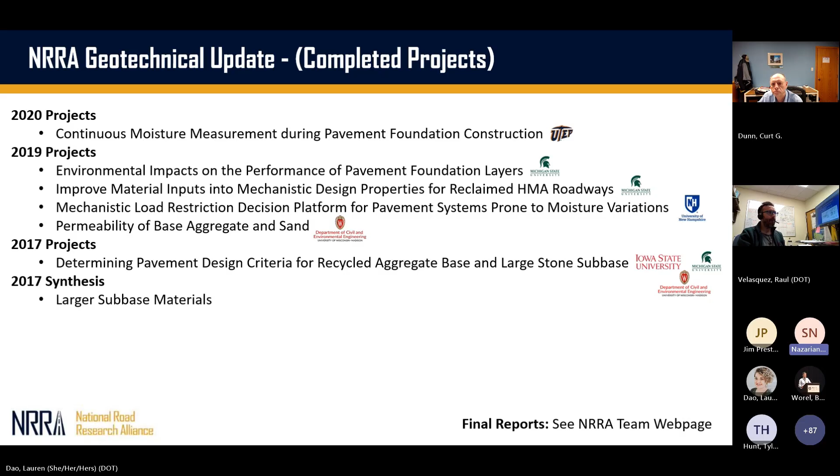I wanted to show you this in the context of an infrastructure asset lifecycle, what we have accomplished thus far since we started this pool fund in terms of the geotechnical team and deliverables. So I'm trying to map the outcomes and results from the research completed so far in this lifecycle asset.

If we go into the design phase, we have completed and made ready available for state DOTs and practitioners some nice guidelines for the use of recycled aggregate bases. We also have a very nice database that practitioners and researchers can use for MEPDG analysis of recycled aggregate-based materials, focused mostly on mechanical properties like stiffness, resilient modulus, strength, and Poisson's ratio. So if you are doing sensitivity analysis of certain recycled materials, you can use that database, summarized very nicely in that research project.

We have also developed and improved criteria for selection of materials for drainability purposes in the context of unsaturated soil mechanics. That was pretty nice, led by University of Wisconsin-Madison, and that project won an award at TRB for best paper of the geotech section, I believe. It's very simple criteria you can use - you get the gradation of your material and some additional parameters, if available, to select in terms of drainability whether it's okay or not to use that material for pavement purposes.

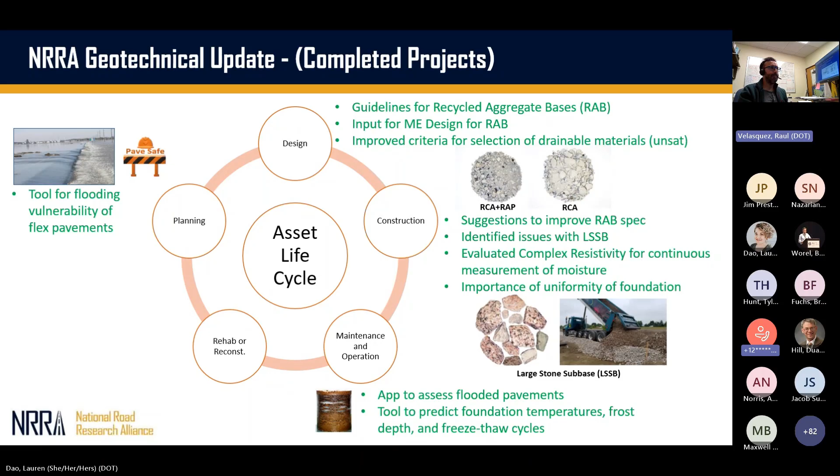I'm sorry, I forgot this one - we have these tools available. Right now you can go and access this information and add it to your engineering toolbox. We have this app you can use for assessing the quality of your pavement after and before flooding, and you have a screenshot of the current version available after phase one of this project. The team is going to provide an update - they are developing a new GUI improved version of it, but you have this version available if you want to use it.

We have also developed a tool in Excel and in Python - Excel for small data sets and Python for large data sets - to predict temperatures and number of freeze-thaw cycles and duration of freeze-thaw cycles, for planning purposes and for estimating performance of your pavement foundation.

You also have this nice unsaturated framework to assess if your material is good in terms of drainability or not - very straightforward, very simple, nicely developed by UW Wisconsin. And then, I think this is very nice, we also have two databases available on the project website for properties of RCA and RAP for pavement foundation purposes. So these are the four tools that we have developed so far that you can easily access and start using. Next, please.

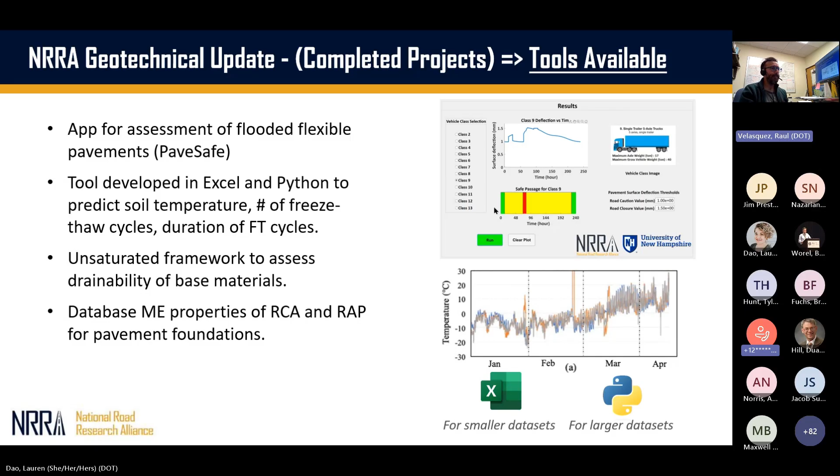Bora, are you online to talk about the Wicking Geotextile project? Hi Raul, yes I'm here. Do you hear me okay? Yes, okay, thank you.

This is a fairly large project, and we got an extension on it. We work with Dr. Puppala from Texas A&M and Dr. White from Ingios Geotechnics. The main goal was to understand both short-term and long-term properties of using Wicking Geotextile in pavement foundation systems, and to check whether Wicking Geotextiles are removing moisture out of the pavement systems, since moisture is one of the most damaging parameters impacting pavement performance. We wanted to check if that works properly in both the short term and long term.

The two main performance evaluations of this project are large-scale testing, one at the Ingios facility and one at Texas A&M, and monitoring the test sites for the last two and a half years, going into the third year this coming spring, to check how the moisture regimes are changing along with the temperature regimes, as well as FWD test data from the mechanical perspective.

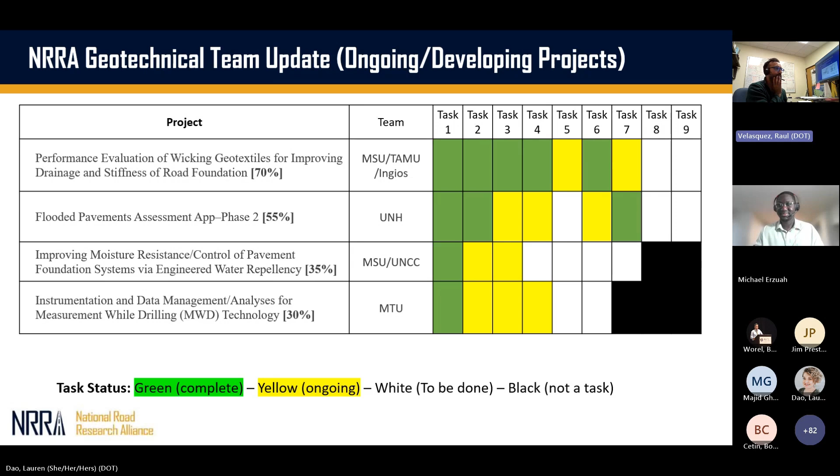So again, mapping into this asset life cycle - the green ones that we completed, ongoing projects, this is where it falls into. So we have invested a lot now working on water management, as Bora mentioned, wicking geotextile and the water repellency technologies. We're working on improving and validating that flooded pavement app in the maintenance operation step, and I'm very excited about it.

Federal Highway is pushing very hard on this technology too - it's measuring while drilling in the planning design stage. I think this technology can help us improve the efficiency of how we explore, how we complete these boreholes, and also the information, how we can connect that to design directly. I think there's a lot of momentum at the national level for using this technology for geotech exploration.

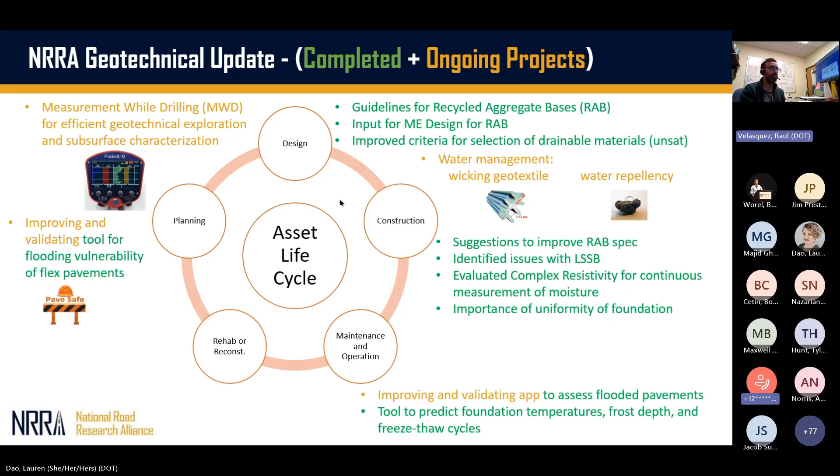And with that, I'll give it next to the next person in line. I think it's Kyle. Sorry if I took a few more minutes than assigned. All right, thank you, Raul.

So I'm going to give an ICT related update here, and just mention quickly that I'm excited about doing these kind of more full group updates, because I think especially for our ICT group, it's great to be able to meet together, but really we want our stuff to be used by the bituminous group, the concrete group, the geotech group. So it's good to be able to share the highlights of what's going on with our group with you guys, to hopefully get some feedback and make sure you're aware of some of the tools and methods being developed that hopefully can be applied for you guys.

And with that, I did want to highlight - I know George Chang gave a research pays off update - but I was pretty thrilled with the conference at the ISIC to be able to get a bunch of people working on intelligent construction technologies together, and just mention it here to the larger group that hopefully we can continue to build on that for the next conference.

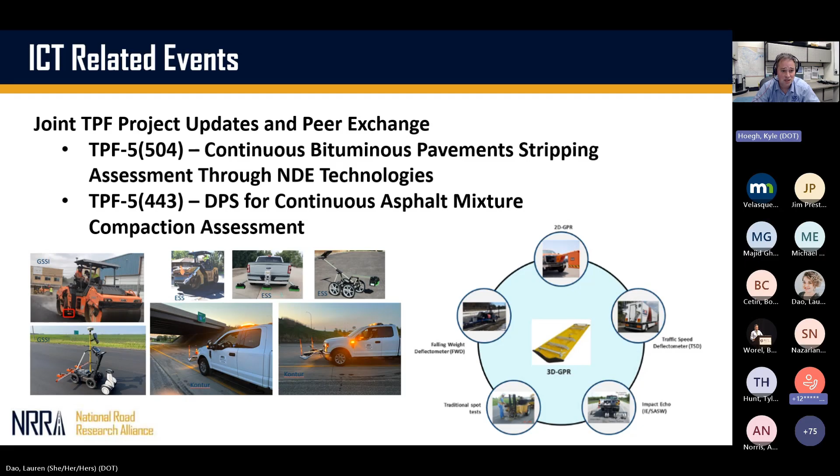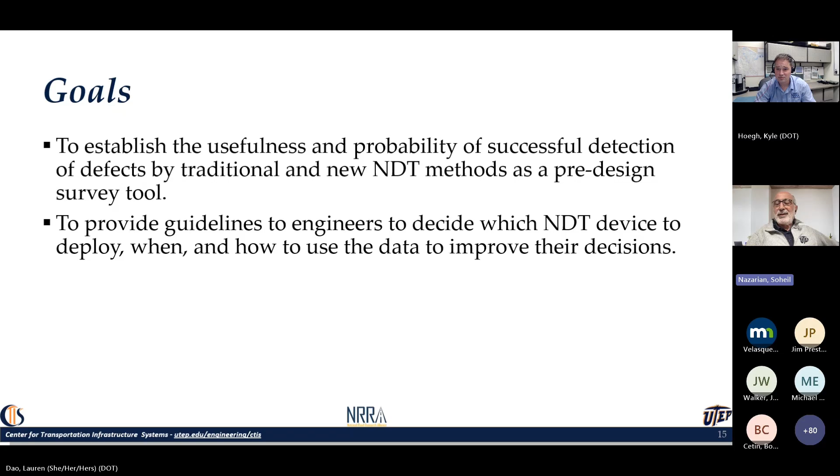Basically our goal is to establish the usefulness and probability of success of detecting defects for the traditional and new methodologies as a pre-design tool. The other one is to provide guidelines to engineers to decide which NDT device to use, when and how, to get the more bang for the buck. We all have a lot of experience with NDT, but there are challenges, good days and bad days. Can we maximize the good days and minimize the bad days, and not send the same tool for different applications that may not apply? That's a goal of the project we're working on.

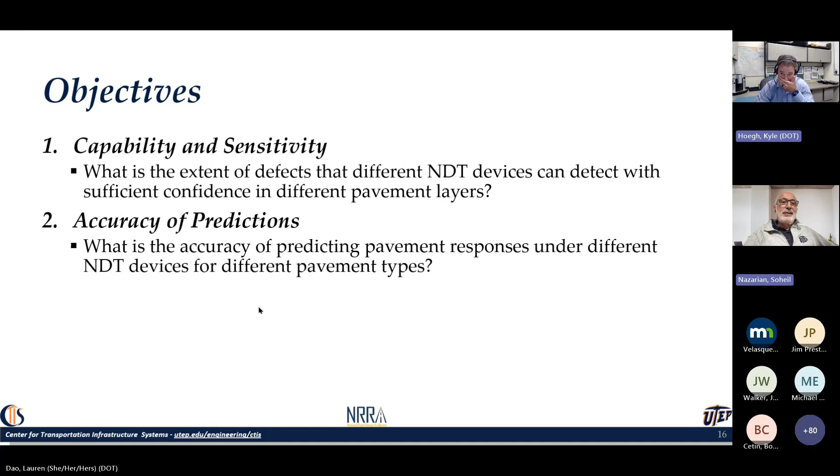We have two objectives. One is what are the capabilities and sensitivity of these different methods to the different types of defects, and the other is the accuracy of prediction. Can we go run an FWD, get the deflection basins, do a back calculation, predict the stresses and strains, and see how good we are doing that, given the uncertainty in the process?

So to answer objective one, we're going to install some defects within the construction on purpose. We're not going to put them in critical places so they generate a pothole or cause trouble for MnDOT, but they'll be in areas with hopefully less traffic, and we're going to see what we're going to do. An example of that is the test sections that EOB just put down for stripping, with different sizes, shapes, and depths, and we can see how well we can deploy different NDTs and how well we can do with them.

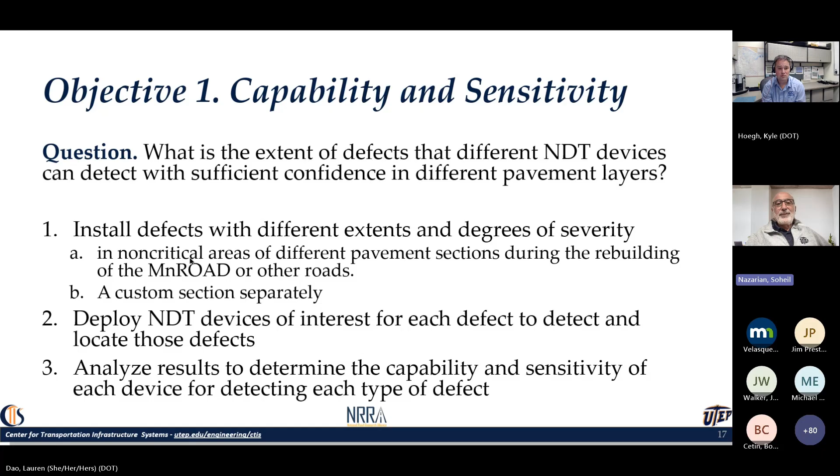Next one—I'm just trying to be as fast as I can, Kyle. I hope I'm not— You're doing great.

Okay, thank you. The second objective, accuracy of prediction, how well we can do the stress and strain calculations. Basically what we're going to do—there are a lot of really nice sensors at MnROAD, we're going to utilize them. We're going to run different non-destructive testing on top of them, get the responses, and then compare what the sensors say versus what our analytical methods produce, given that there is data processing involved.

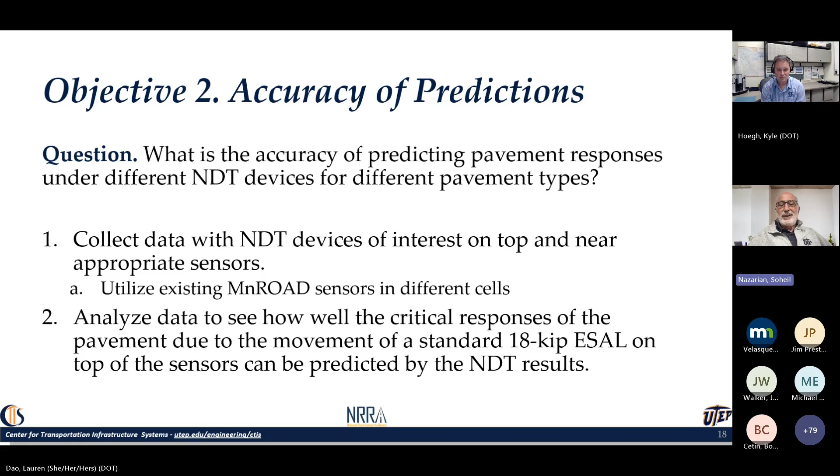We started on November 1st, and there are 7 tasks. I would like to focus on task 2 today, and hopefully in 3 months we can give you more information about task 3 if there's an opportunity. That one is basically forming a technical advisory panel and setting the direction of the project, because there are so many different tools, so many different defects, and so little time before I retire. So we have to focus things a little bit. Let's go to the next one.

Next slide, please. Task 2 is forming a management team and a technical advisory panel. You saw a list of really highly qualified, nice people from both sides.

The first thing we highlighted, we put a questionnaire together with the help of Jacob and Kyle, and we would like to widely distribute this and see what impressions people have, what NDTs are of interest so we can focus on the top 3 or top 4, what type of defects, what type of uncertainties are there to address that is of most interest, bang for the buck.

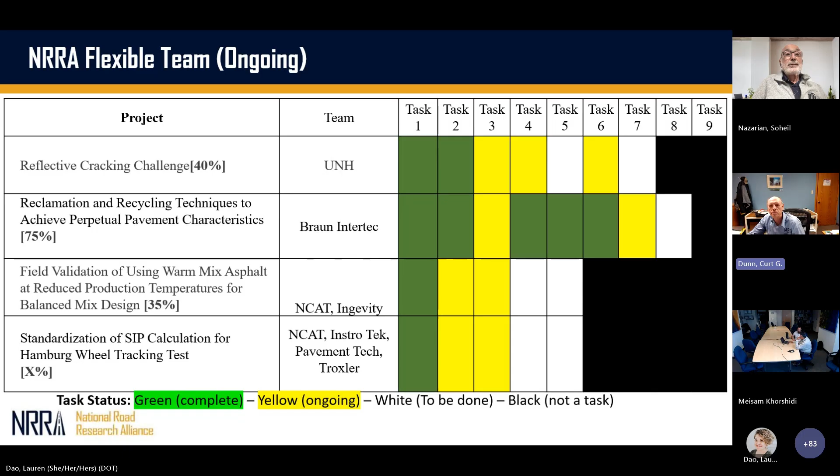Before I do, though, I'd like to thank all the Flexible team for their hard work throughout the year. I think we had a lot of progress, and we had a lot of really good monthly meetings as well. We're continuing to bring forth really good ideas that we turn into sound practical research that, once completed, we can take back to the agencies to implement.

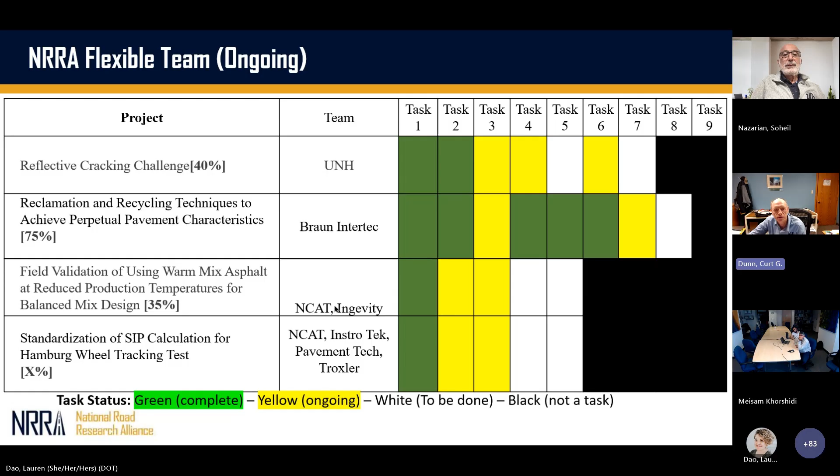Then we have a standardization of SIP calculation, which is in the task 1 stage as well. Next slide, Lauren.

We've got some developing projects coming around too. Two of them, recycled binder availability and perpetual pavement test sections in wet freeze climates, have RFPs being developed so they can be posted. And then two more, mix rejuvenator test sections and continued monitoring of the original I-94 sections, are past the contracting stage now, but just starting to get going.

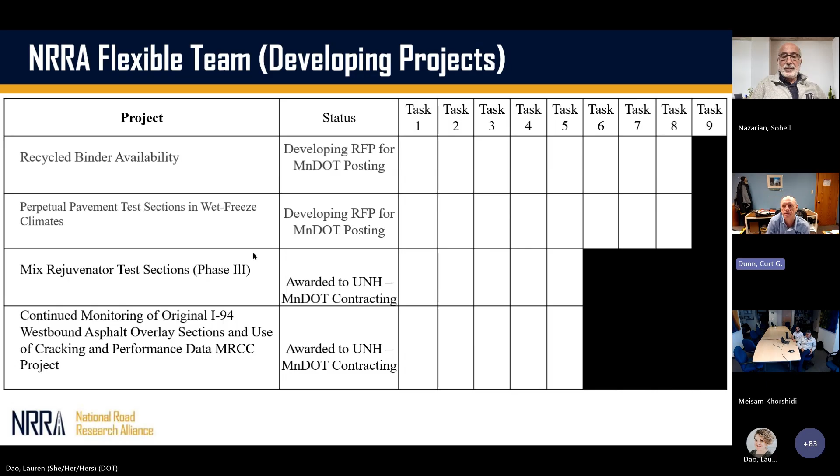Next slide, Lauren. There's maybe a couple slides that didn't get in there, but there were some completed sections that we have, and there's about 8 of those.

Anyway, now that we have the completed sections, it would be good to start implementing and take some of this research back to try to implement into our agencies, into our highway programs and stuff. Next slide. Okay, that's it. Okay, so maybe go back to this one. Okay, I think from here, this one here, Lauren.

I think we'll hear from Michael now. Michael's going to talk about the reflective cracking study and some of the testing, field testing performance that we've had so far. So if you'd like to go ahead, Michael.

Yes. Good afternoon and good morning, everyone, depending on where you are. Curt, really nice job adapting and doing this on your feet when you're missing 4 or 5 slides in the slide deck.

I'm going to put the link to our NRRA flexible team page that has the link to all of our projects, which is what we used. And the portion that we didn't cover was our kind of historical and completed project portion, which didn't make it into the slides today.

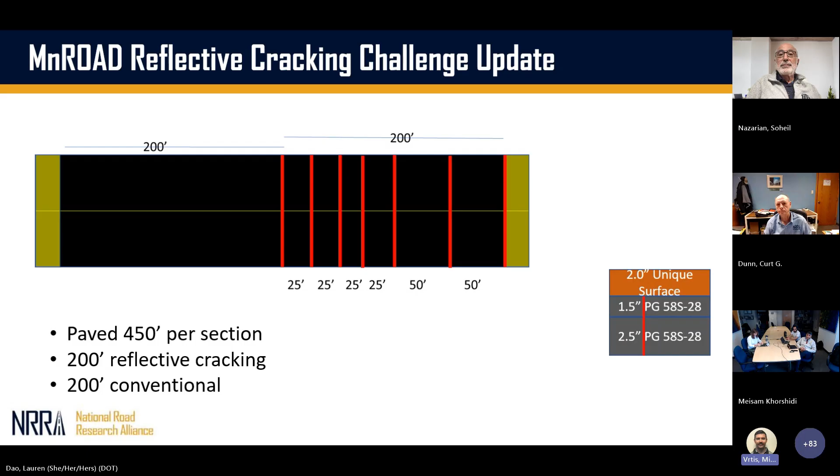These are mainline test sections at MnROAD. There are 10 different test sections, totaling 450 feet. Half of the test section has underlying transverse saw cuts in the lower asphalt lifts. The top surface is 2 inches, and that is a unique mix. Next slide, please.

Lauren, will you click through all the animations and then back to the end? So those 10 mixes feature 3 different binder grades, most notably a 49-34, a very soft, unmodified binder. We also have 2 different types of recycled plastic and recycled rubber, 2 aramid fibered sections, and a MnDOT SuperPave 5 section. Next slide, please.

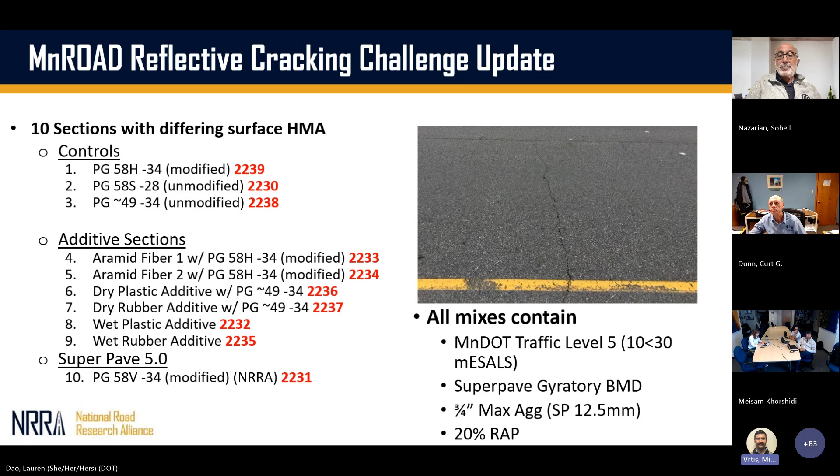Quick performance update: there currently are no cracks, so none of the cracks have reflected through any of our surface mixes. We have very good ride and consistent ride over time, and then very minimal rutting, even in the soft binder section. All of our sections have under 5 millimeters of rutting, or about a quarter of an inch.

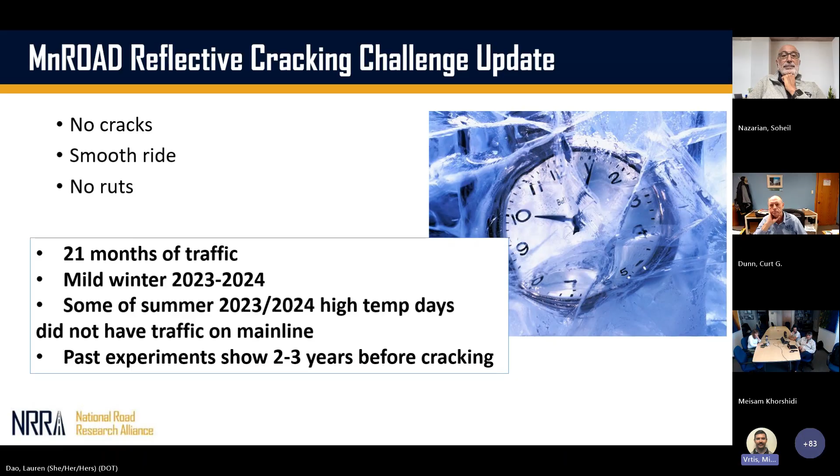A couple caveats with that. As we've mentioned already in this meeting, we've had a very mild winter that these sections are under. And we've been doing a lot of reconstruction at MnROAD, so traffic has been off in some of the summer months while we were building concrete sections down the main line. Also, in the past it's taken a couple years before we see significant low temperature cracking distress in our sections.

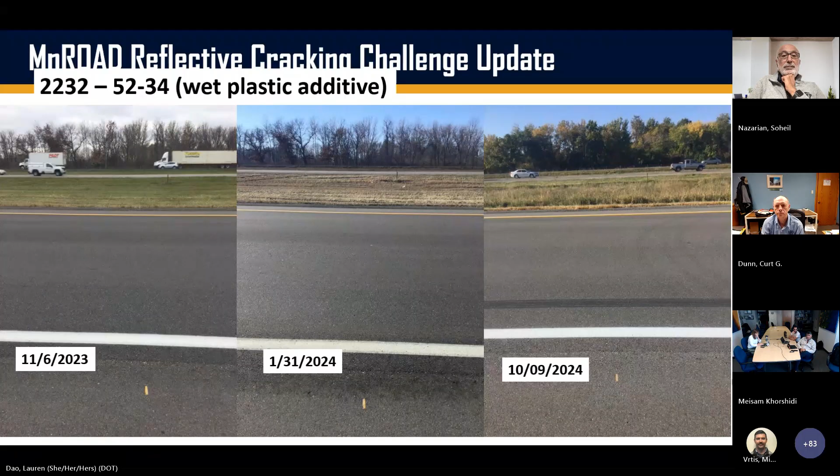This is just a couple examples of the sections that we're monitoring. We're taking the same picture in the same location. Mark, at the bottom of each image, that is a GPS location of the underlying saw cut underneath. So we're trying to capture that as it reflects through. Just more examples of the same.

And then just to wrap it up, since Dr. Chetin requested a cold winter here in Minnesota, I'm going to have to agree with him. We're starting to get to the point in our reflective cracking challenge experiment that it's getting awkward that we don't have any low temperature cracking in Minnesota. So just because he requested it, let's get a nice cold, severe winter.

Now I'm going to turn it over to Dr. Daniel and Meisam from the University of New Hampshire to give us a laboratory update and tell us which of those 10 sections is going to crack first.

Thank you very much, Michael. And Lauren, if it's okay, I'll just share my screen just to get... yeah, thank you so much. You should all be able to see the slides. Let me know if you cannot see the slides.

And Kyle, I'm sorry, but I'm part of that group of faculty that you said you're paying money to have a cold winter. I'm part of that as well, and it seems Michael is on board with it too.

So anyhow, the plan here is to just go through this very quickly. One thing I will note is this is not just the effort of University of New Hampshire. It's actually a partnership between us, Auburn University, NCAT, as well as Heritage Research Group. We should have put logos and names of everyone, but this presentation is just about what's done within the UNH part of the contract.

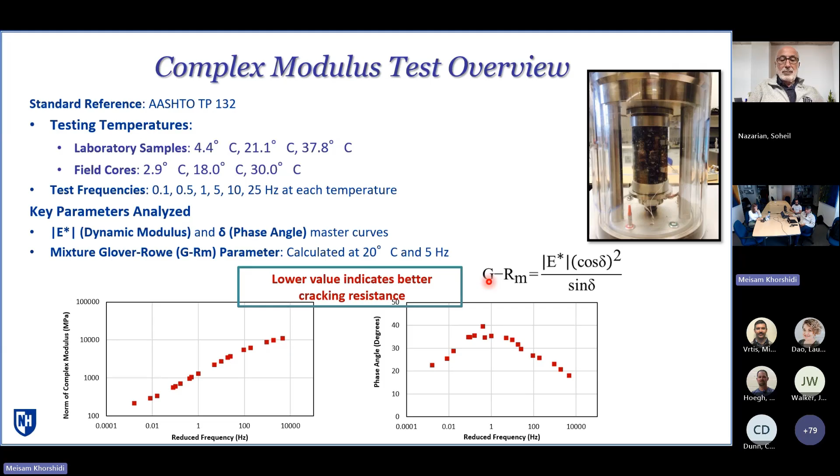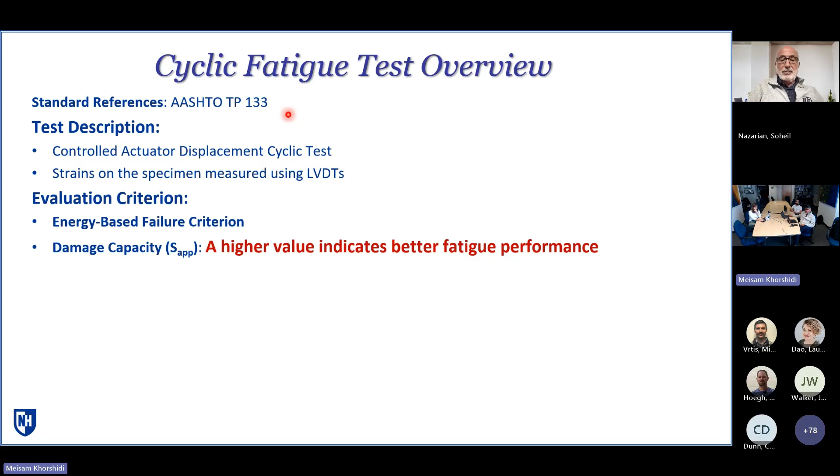In addition to this, we have also done the cyclic fatigue evaluation using the direct tension cyclic fatigue test, which is also an AASHTO specified test. It's a controlled actuator displacement test procedure run on the same AMPT device as complex modulus. Just a quick refresher: every cycle you are doing a fixed actuator displacement, but what you actually use is the strain measurement on your specimen as it is tortured with repeated tensile cycles.

And also you look at what kind of resistance that specimen is generating. And obviously as it degrades, its resistance capacity drops. Once again, it generates a wide swath of data from this test that can be used in performance models.

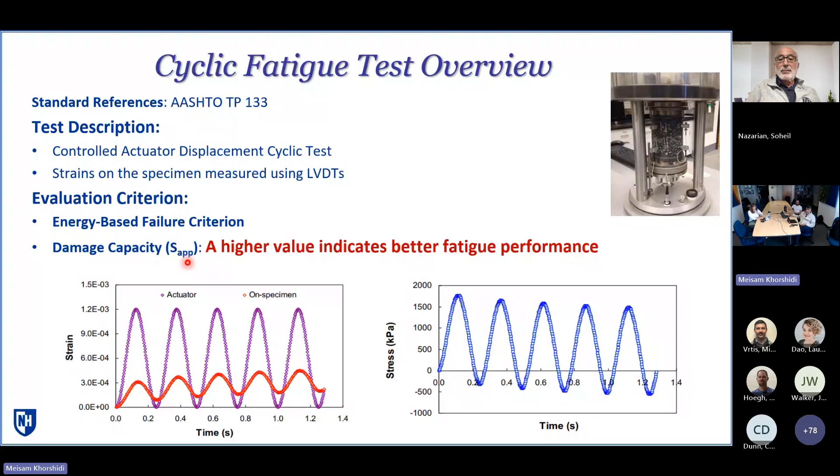For today's presentation, we'll just focus on an index parameter that Federal Highways has really developed and is recommending for evaluating fatigue performance of your mixes, called the damage capacity or Sapp parameter. There's also some agencies that have started to implement this as part of their balanced mix design type of approaches. So just looking at that index from complex modulus, we are looking at the Glover-Rowe mix parameter.

Once again, remember, lower value is good for cracking. So you can right away see that all of those mixes with different type of additives from additive group, they're actually all looking fairly good compared to your control, which is just a straight up 58 minus 28 mixture. Even SuperPave 5, which does use a modified binder and has SuperPave 5 attributes, they are all looking better.

Typically, we plot this parameter on log scale. We did not, because if we did, you cannot really see the intricacies or differences between all of these treated mixtures as compared to controlled mixture.

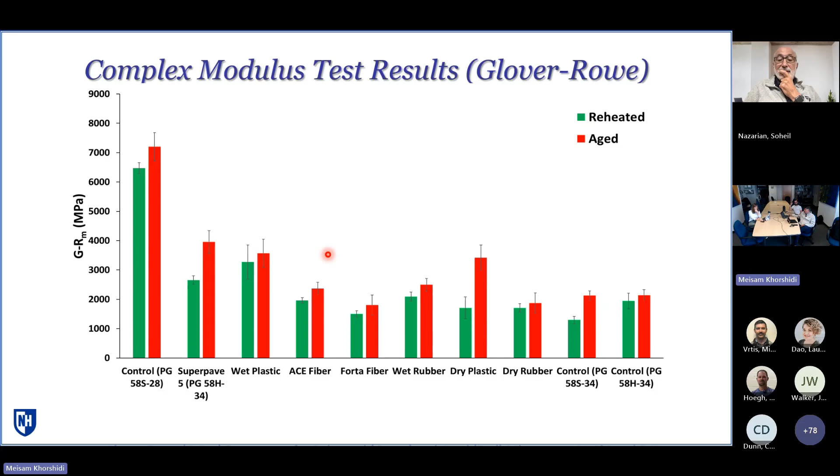Other thing we note is, as expected, as we age these mixtures, they all get poorer in cracking resistance, except the difference is that some of these age not so well. So if you look at two examples here, the Super Pave 5 and also the dry plastic, it seems to have a little bit more aging susceptibility as compared to other mixtures. So the main message is that what we are seeing here is that all of these additive group mixtures are almost comparable, which doesn't surprise me because they were all designed using balanced mix design.

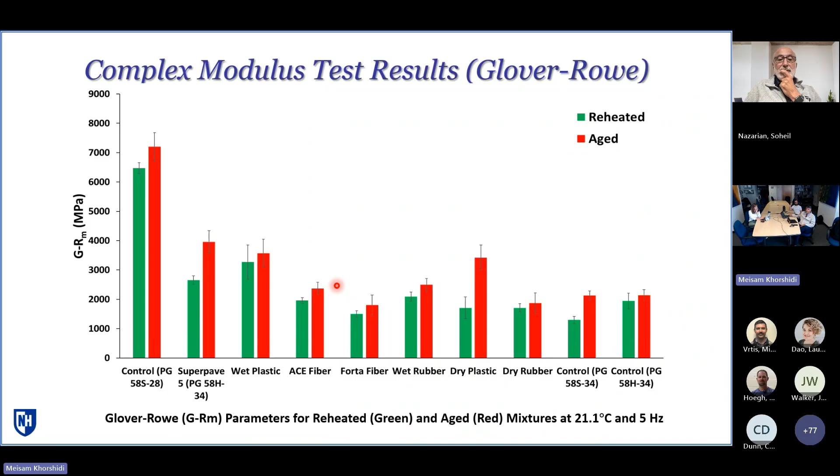Control definitely inferior. So to answer your question, Michael, I'm hoping that at least this winter we'll start to see some cracking in the control section as opposed to some of these other sections. Other sections we'll have to see how things pan out.

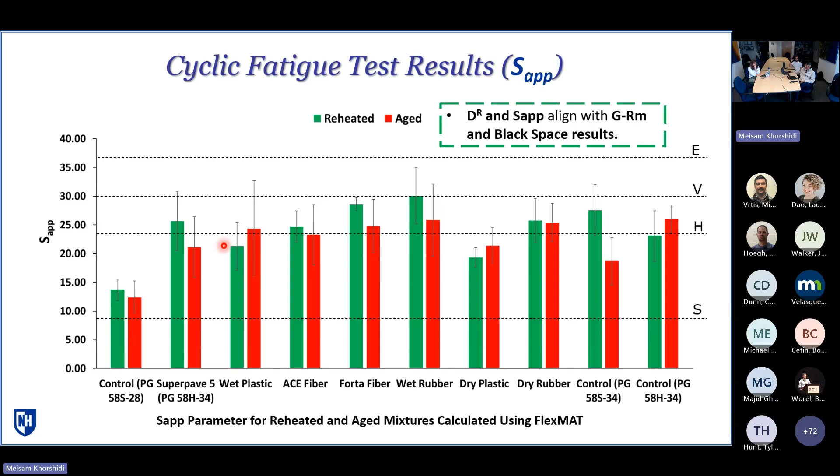Now keep in mind, there's just 2 of the 7 different type of tests that we are going to be seeing on these mixes. We have already started or had a jump start on task 5 of this project, which deals with modeling of performance.

And while we have not started to do more reflective cracking modeling, as you saw in Michael's presentation, half of these sections are more traditional flexible, so we can do a FlexPAVE analysis, which is again a system developed or right now promoted by Federal Highways to predict fatigue performance. And this is just an example of how it's set up.

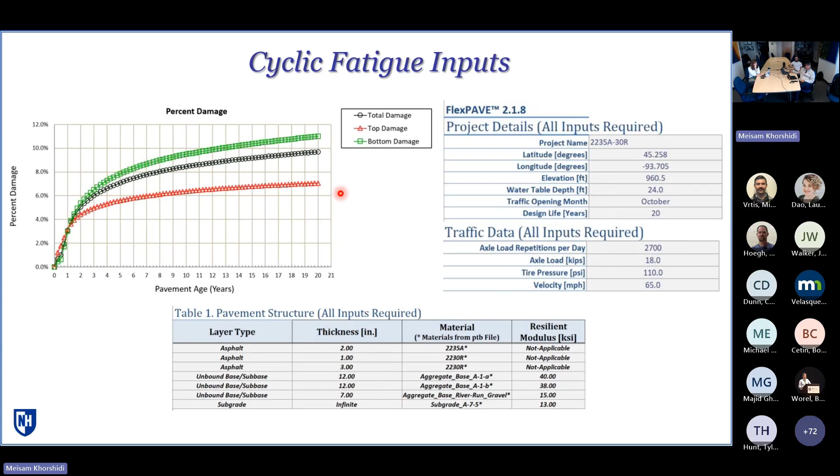It's all based on Excel-based system now, so very easy to run. Anyone can adopt its usage. What comes out of this analysis is essentially what type of fatigue damage you can expect after certain levels of traffic. And this again a sample result.

We also did some of this analysis where we treated that lower layer not just as an intact new layer, but in some cases treated it as like an old layer that may already have some cracking. It's again, this system is not developed for reflective cracking, but we are trying to at least see what all we can learn from it.

So here you can, the advantage of doing this is it combines everything. It combines your fatigue resistance of mix, but also what kind of stiffness that mix has, and also what kind of temperature sensitivities it may have, because it actually simulates different seasons or different type of temperature conditions.

So far, nothing really jumped out in terms of one that will have high damage compared to low damage. As expected, you can see slightly higher bottom fatigue damage on the control section, but time will tell us what we are going to see in the end, especially as the field data also starts to come in.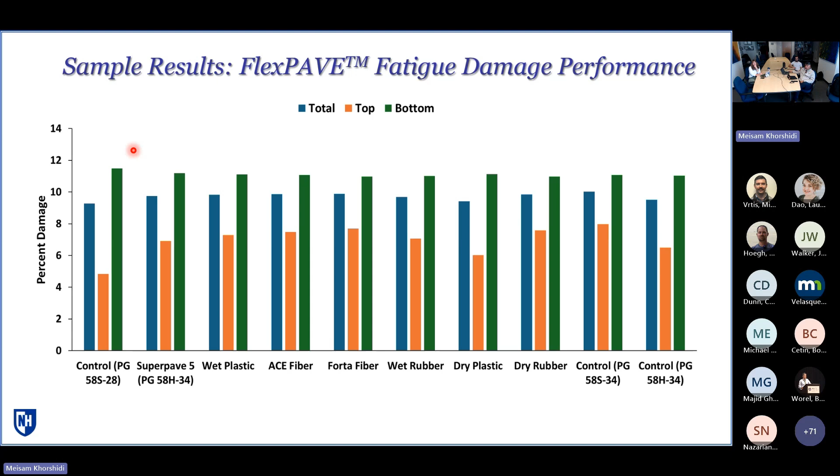So the very last slide here is just talking about what's next. We still have quite a bit of lab testing effort. We are here at UNH doing the UTSST and DCT testing to wrap up those low temperature properties. But also, since this is NRRA, Illinois DOT is conducting IFIT testing for us, and they expect that to be done by May next year. And then we need to have some discussion with both MnDOT and Wisconsin DOT to get the ideal CT and Hamburg results as well.

We do have some ideal CT results because NCAT also tested it for the additive group, but not for every mix, just for the additive group mixes. So we need to fill that gap. Missouri Center for Transportation Innovation is supposed to do TSR and ideal RT testing. Hopefully we can get all of that data by early to late spring next year to be able to do the comparisons, and hopefully by that time we'll also start to see some cracking. All of those properties will continue to go into performance modeling as well.

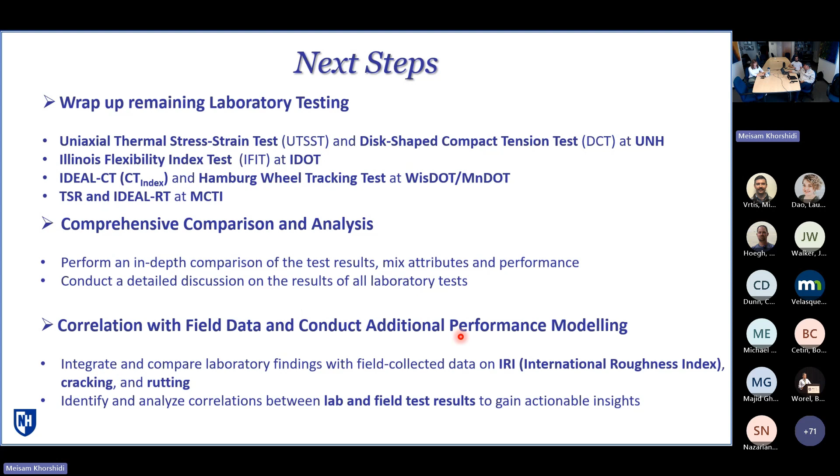So that's just a very quick summary on this project, and we are also excited that the I-94 westbound project is kicking in, because that will supplement the data that we have with this experiment. Michael, I'll stop sharing here, and then if anyone has any questions, we will try to answer those.

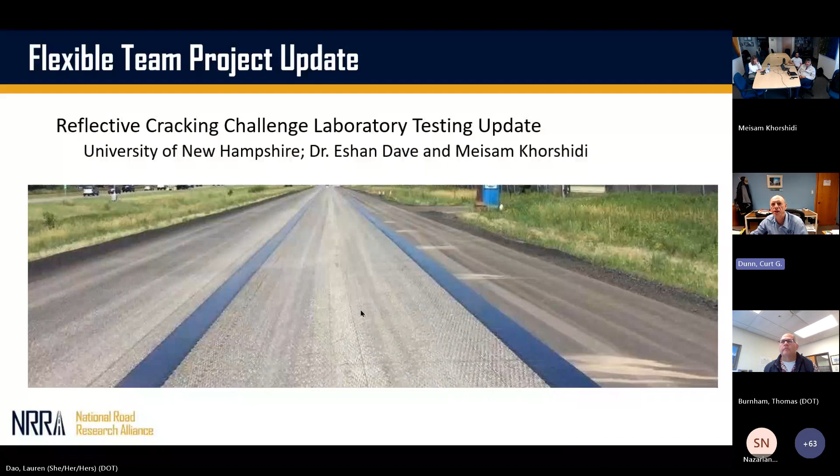Any questions for Eshan or Meisam? Okay, thank you very much for those two wonderful presentations, Eshan and Meisam. That was great. Thanks, Eshan.

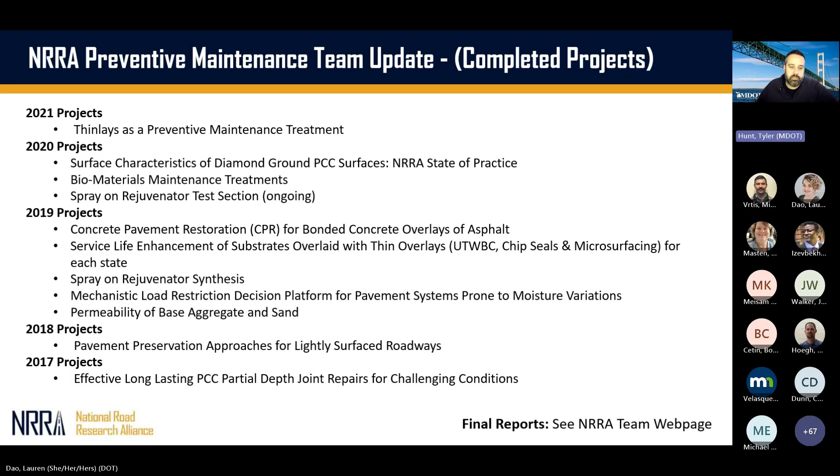I wanted to highlight our spray on rejuvenator test section on MnROAD - our other research has been very useful to me. I wanted to highlight this list and let folks listening in know that having this research is really valuable. Can we go to the next slide, Lauren?

We have 3 ongoing projects right now, and I believe all my research groups are here. The use of recycled materials in pavement preservation is co-research with our flexible team. Adriana, do you have an update you want to give the group on the research?

Yes, hi, good afternoon everyone. For the project, we are looking at and developing basically a framework for evaluating the feasibility of using different recycled materials into pavement preservation treatments. Those treatments would include chip seals, slurry seals, and microsurfacing.

We have completed tasks 1 and 2, which is the literature review and developing the experimental plan. During those tasks, we identified different materials that people have been looking into as an alternative to replace virgin materials. Mainly RAP is basically the big one and the low-hanging fruit there.

But people have also experimented with things like recycled tire rubber or recycled asphalt shingles, and to a lesser degree, materials like recycled glass or waste concrete, brick, that sort of thing. Based on the existing literature and a survey we did of the NRRA states, we identified that what

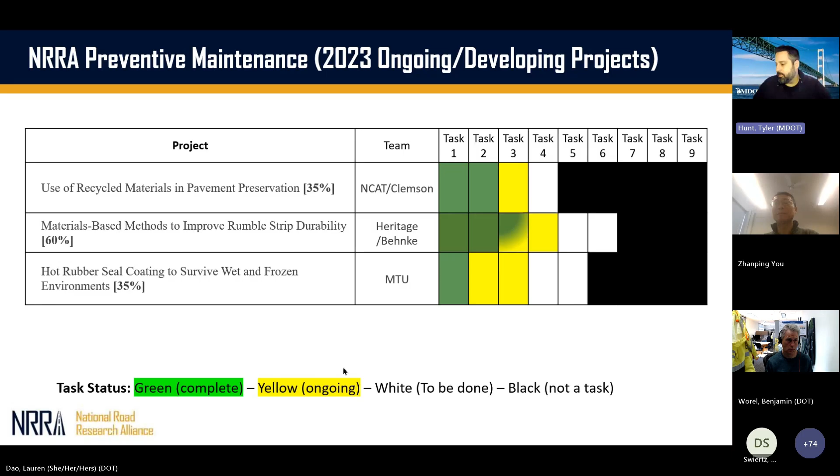Before I turn it back over to Ben, I just wanted to say thank you to all my research team, all my PIs and my TAPs. I took over the role as chair earlier this year, and I was trying to get my feet under me, and the transition has just been seamless. They're really forthcoming with all the information I need for doing the presentation. So I just want to say I appreciate you all. And with that, I'm going to turn it back over to Ben or Lauren.